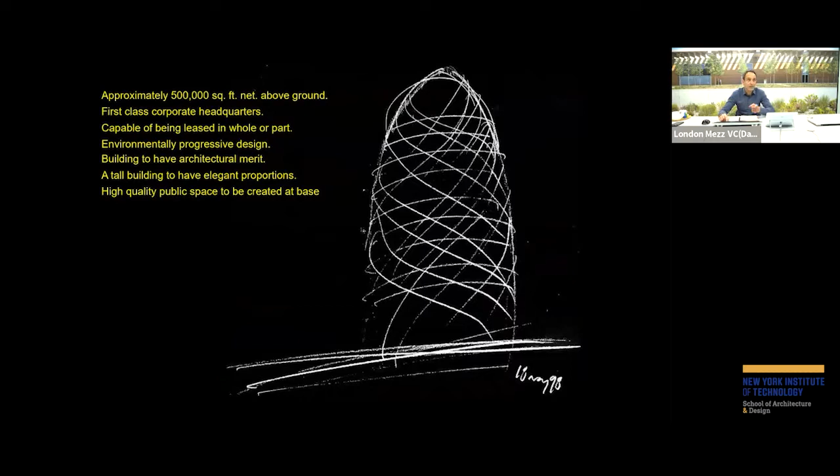This was, believe it or not, the brief essentially that we had from Swiss Re, one of the shortest briefs we've ever had. And it was done deliberately in order for us to investigate and find out with them as our client what they wanted. So there were certain criteria required, just in terms of area and in terms of their aspirations for it. But the one that's relevant to the conversation today is around its environmentally progressive design. And they deliberately used those words.

They're deliberately a little nebulous and hard to pin down because, again, they weren't sure what was going to be possible. And they didn't want to dictate with a more prescriptive building definition quite how many watts per square meter per person were required within the office space. So they left it as this loosely termed phrase, environmentally progressive design, for us to develop and investigate with them during the course of the design development of the project.

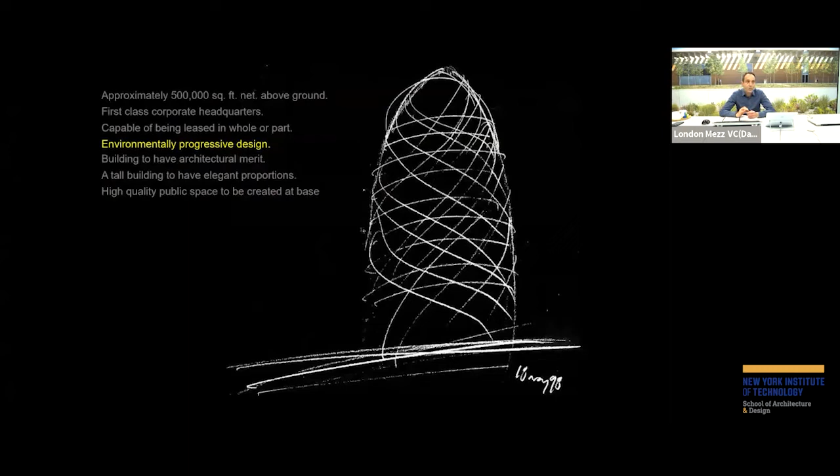As you go through more and more sophisticated systems, then the cost increases considerably. So by the time we get to very, very active systems, the cost of implementing those active systems is considerable. So the more we could do with the form of the building and with the orientation of the building, the more we got out of the performance of the building for a relatively modest financial impact.

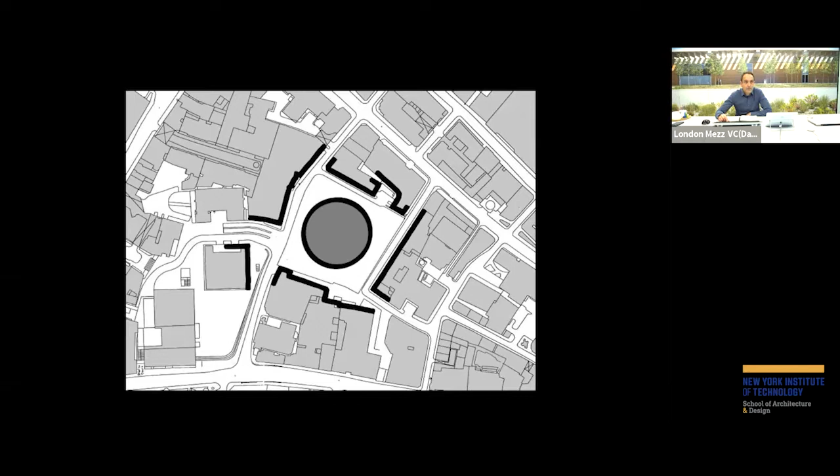There was no way we were ever going to take this to perhaps the height that we might have originally enjoyed. So there were a number of external factors bearing upon us, together with the brief that Swiss Re provided for us. So taking those as a cue, if we were going to pinch the building in at the base, then there was a kind of a logic to the form being squashed and condensed on those lower levels.

Because there's a need for quite a significant amount of office space, and one of the primary drivers of office space is ensuring that people are able to get to their desk in as quick and efficient a manner as possible, particularly in the morning up peak. The need to provide large amounts of floor plate within readily accessible and quickly accessible lift traffic was another primary importance.

So having larger floor plates, and with those bigger floor plates having the advantage of excellent views. Again in London, and it's even the case now, the predominant mass of building stock in London is up to about 8 stories tall. There are then the pinpoints that go up higher than that, but you get excellent views once you get up to about 8 floors high. Even in the City of London, the views are still pretty good at that height.

So it made sense for floors to be wider, larger, bigger floor plates, where they were quick and easy to access via the lifts, but also where you then got fantastic views. Then the brief for the top of the building space was very different. Swiss Re wanted their entertainment floors to be up there.

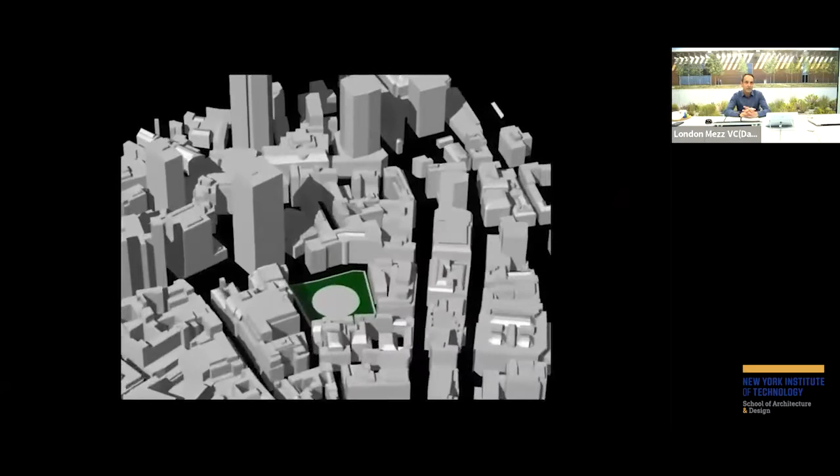So again, setting the agenda for what the top of the building form was going to be like, putting all those considerations together, it helped to set up this diagram that you can see in piecemeal fashion here. I want to just show you a clip now that will run for about a minute, and it shows the same volume, 500,000 square feet extrapolated across 4-meter high floor plates, arranged differently on the site.

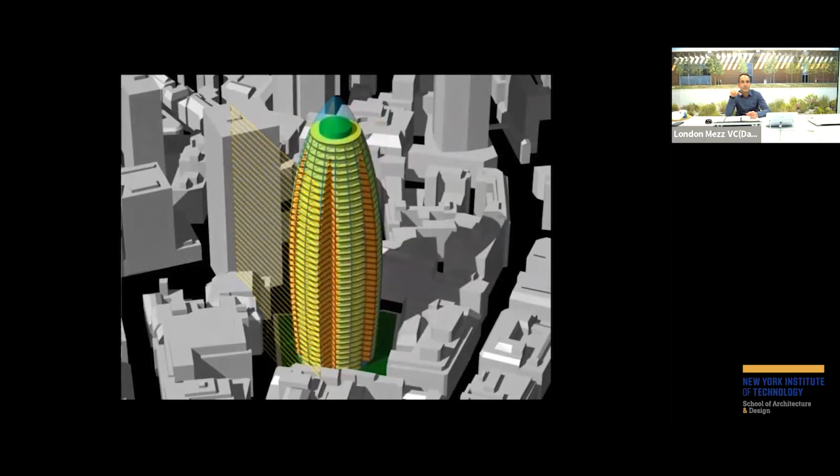So if we were to have completely filled the site with that volume, then as we were required to pull the building in slightly, then to deform the shape of it into something that's more recognizable as the building. I'll come on to talk about some of the reasons for that later on. Then the splicing of the atria around the building. Again, I'll talk about a number of those and why they're positioned where they were a little later.

The twist that occurs from one floor to the next. And then the layering: you have a layer for the main structure of the building, and then there's a finer grain, a finer layer that's overlaid on top of that for the exterior envelope, for the cladding of the building. But that kind of puts most of the main thoughts that we'd had together into one illustration.

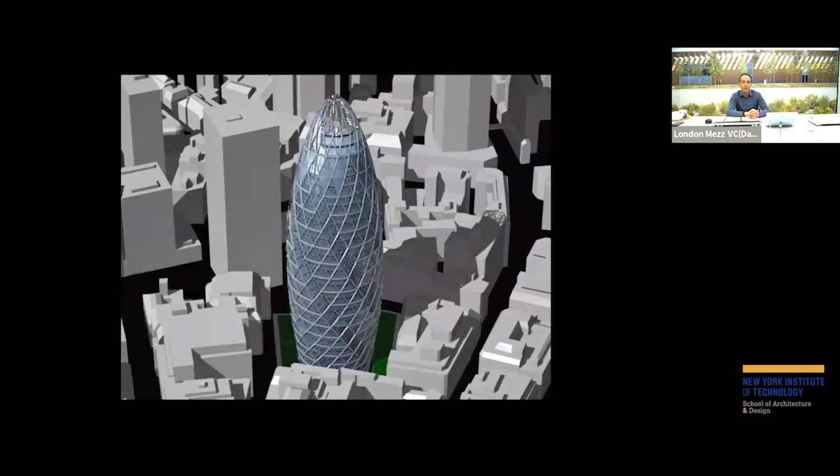Part of the reason for curving the form of the building, a lot of it is to do with its environmental response, which I'll come on to shortly, but the other is to do with the perception, its perceived bulk. There's still an adjacent building to it. There's a planning permission for a much, much taller scheme on the site, but the existing building, which was existing at the time that we constructed this, is not dissimilar in terms of its overall area, its floor plate size, but it's square in form.

And if you lay a square on top of the circumscribed circle that we have for the plan of the Gherkin, and then perceptually how that appears, because with a cylindrical form or a slightly deformed cylinder, there's no edge, there's no corner, there's no definite side to the building that you can ever say, that's the actual corner of it.

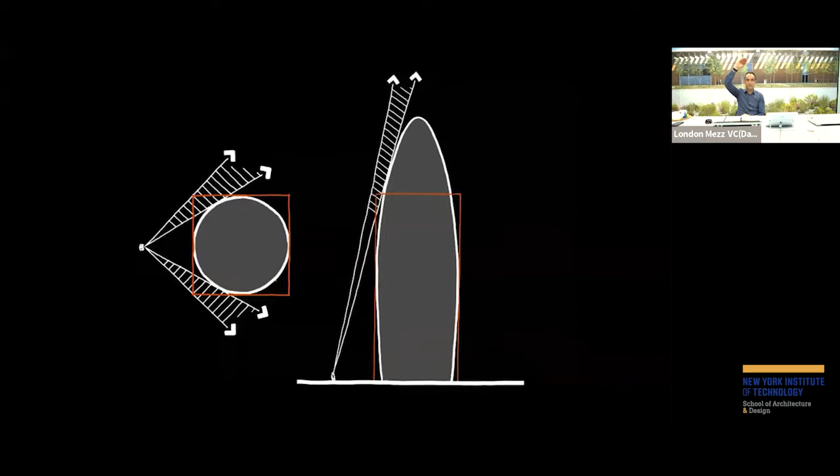Your eye is always chasing the edge of the building around. And again, by altering the building's vertical elevation so that it's curved, pinched in at the bottom, widens and goes to a smaller form up at the top. The same thing when you're looking up at the building, there's never a point where you can say, that's the edge of the Gherkin. It's always kind of moving away, stepping away from you. And perceptually, it makes the form, the bulk of the building.

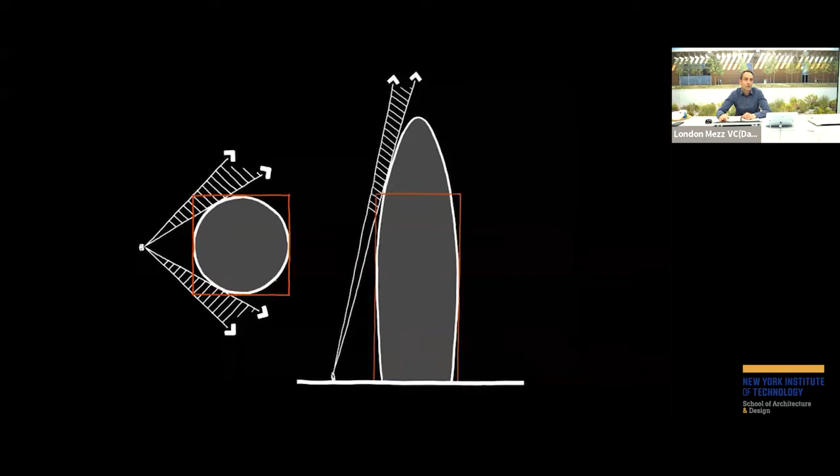We have some pretty significant floor plates. They're up to about 20,000 square feet on the larger floors. The perceived mass of the building is considerably reduced because of its form. To illustrate that in plan and how that then affects the amount of daylight penetration that we get deep into the floor plate. A traditional center core building, obviously excellent light all around the outside of it, but there's this subprime space adjacent to the core where very little natural light ever gets to permeate.

Just doing a purely cylindrical version of that, or a circumscribed circle within that, doesn't really improve the situation. It just puts it into a different form. You still have this space around the core, which is less attractive, less well lit, and with less access to views. The trick that was employed on the Gherkin was to then cut a series of light wells in, and in the end we decided upon 6 light wells.

So 6 light wells cut right back to the circulation route of the core, and that provides daylight much deeper into the floor plan, so that pretty much all of the available floor plate gets good access to daylight, and most crucially, really good access to views. It really doesn't matter. Even if you're right back, you still get these glancing views down the atrium, or correspondingly back up the atrium to see the sky, or down towards the ground. So that sense of having the city around you, not just looking out to the horizon, but being able to see down towards the ground, a crucial part of people feeling more grounded within their workplace.

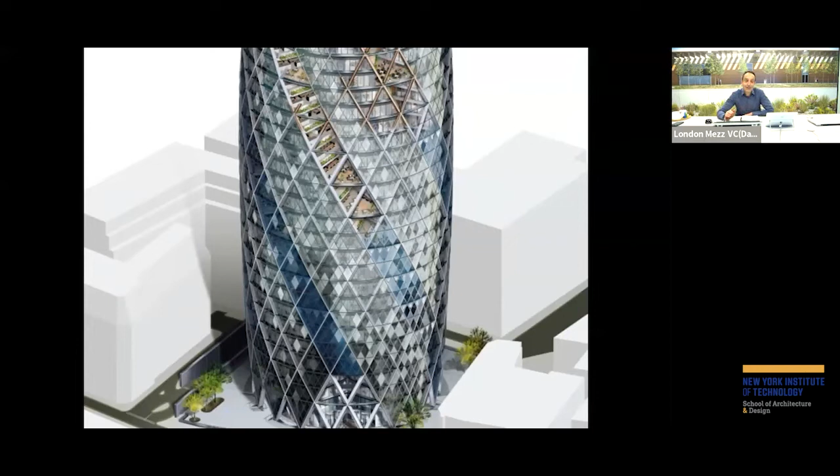That's a view looking up one of the light wells, and just to give you an idea of how it stacks up. The light wells, there's 6 of them per floor, and they are 6 stories high. So they occur in these 6-story stacks as you move up through the building. That's a view from one of the lower levels. I think that's level 10, looking up to the underside of level 16.

The light well itself is a 20-degree arc, which is then placed against a 40-degree arc of office accommodation. So in total, there's then a 60-degree portion, which is then arrayed around the rest of the floor plate 6 times. And that's essentially how it's built up. What then happens is each floor, as it goes up,

Robert, you're muted. We're not sure why you're muted. You need to unmute, please.

Being all right here. Yeah, we're good. Is that okay? You're back. There seemed to be an auto prompt that came up on screen. So if it happens again, I think it will just stay for 30 seconds and then disappear. Hopefully not.

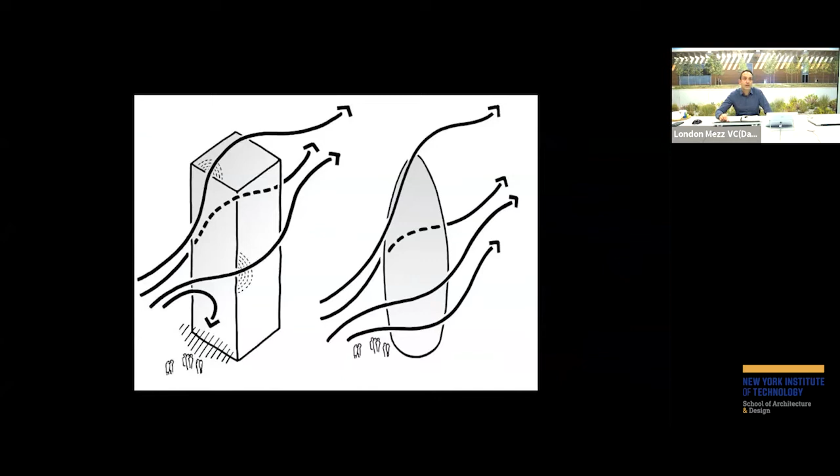That's actually a piece of our printer rolls. So the rolls that we used to do all of our printing on, like a great big long toilet roll, that's what formed the structure for us to then pin the foam cuts. So all of these were just bits of foam board that we cut. We got very good at using these compass cutters. So like a natural old-fashioned compass that you would use to draw circles in maths, exactly the same as that, but with a very long extension and a scalpel blade on the end of it.

We got very adept at cutting foam board and then cutting into the foam board to consider whether we were doing triangular cuts, square cuts, trapezoidal cuts, whether they flowed in one direction, whether we had 4, 5, 6, 7 per floor, whether we changed it from one section to another. All of those were explored with these models.

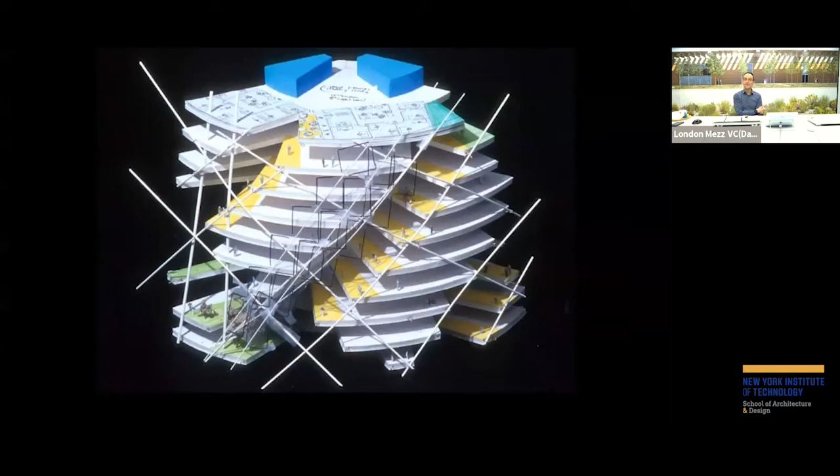In the shoulders either side of it, in the winter times or the less clement times, you would need an element of heating to supplement the natural ventilation. And then at the other end of the scale, in the summertime, you would need an element of cooling in order to supplement the natural ventilation. But the plan was that for a period of time when the temperatures and the wind conditions and the precipitation was right, there was the opportunity for natural ventilation.

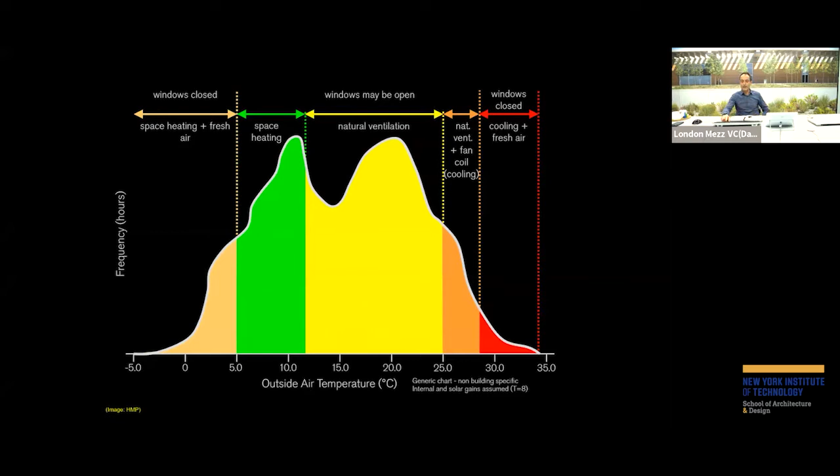And in terms of the final modeling of that, I have to be a little bit careful about this, but we still get a bit irked here. We still get a little bit annoyed that there's a vast amount of data that has been collected on the building. And we've been trying for a long time to get access to that, because we would actually love to know how well it has performed against the benchmarks we were working to at the time, against the prescriptive requirements that we set for ourselves with our client. It's something we're talking to the current owners about, and they're quite open to that, but we still haven't got the data on it. We'd love to know quite how well it does perform.

But at the time, and you've got to bear in mind, this was going back to the late 1990s, the specification back then for a prestige high performance artificially ventilated office building, you were looking at about 350 kilowatt hours per square meter per annum. We managed, with our predictions, to get that down to about 150. With the building performing optimally, we believe it would sit probably around about 140 kilowatt hours. Quite whether that's been achieved in practice, I don't know, and I couldn't give you the answer. I do hope one day we'll be able to get access to all that data.

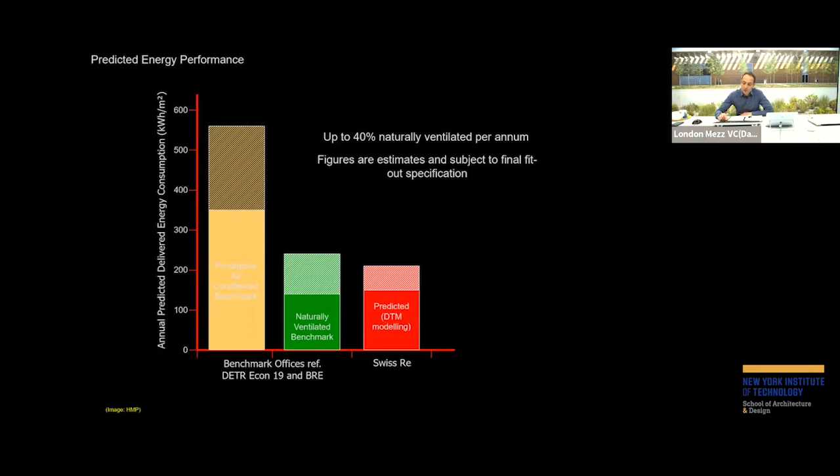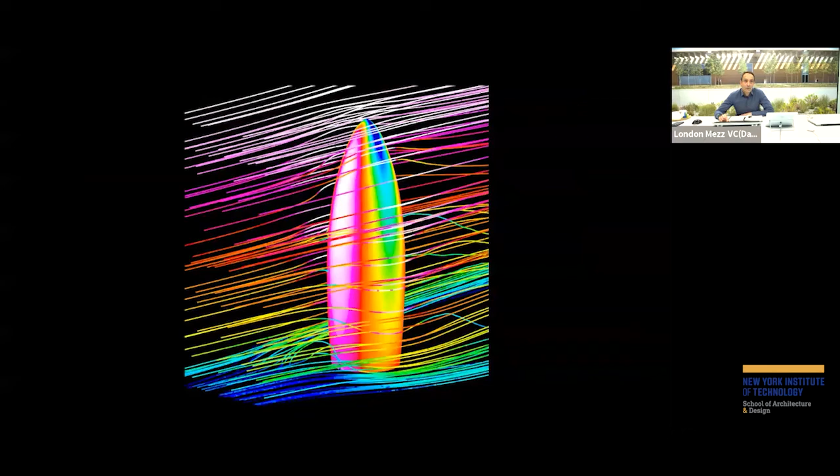An awful lot of modelling was done, both CFD modelling, but traditional wind modelling as well, where we simulated the wind environment around the building in order to test different wind pressures, to be sure whether it was practical and possible to open the windows, particularly higher up the building where the wind velocities are stronger. That was then corroborated with CFD modelling. And it's culminated in the building having this, and it reverts back to some of those very early forms of the building, the pine cone shape of the building.

During COVID, particularly the first summer, the 2020 summer, London was very hot for that first period. So May and June was incredibly good weather here, or incredibly sunny weather, whether you see that's good or not. It was incredibly sunny weather in London. The building was hardly occupied at all. So they weren't running the air conditioning. The offices weren't in operation. So the building was heating up enormously during the day because there was nothing running inside it.

They then opened all the windows, particularly in the latter part of the afternoon, and kept them open during the evening. And the nighttime purging of the heat from the building was incredibly successful. And it went for weeks and weeks when we didn't have any rain at all and very, very warm weather. And they just left the windows open the whole time. And it made for quite comfortable conditions inside. So it vindicated the strategy we had. I just wish this was more often used now. But I'll just run this video for you, which will show you how that occurs.